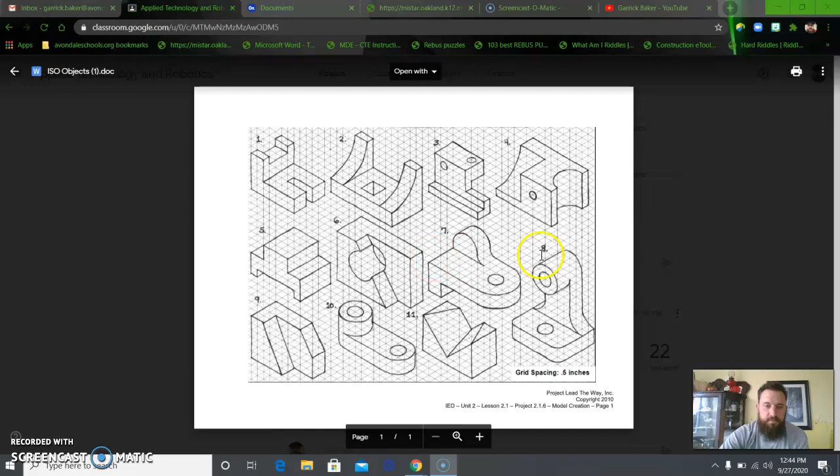All right, so now we're getting into some more difficult drawings here. 6, 7, 8, 10, and 11 are probably the hardest ones on here, in my opinion. So we're going to start with number 6 first.

Okay, so we're going to do this in 3 different parts. First this back rectangular shape, then we're going to add this awkward shape, and then we're going to put the hole through it. So I'm going to start, get the measurements of this object here and extrude it.

So it is, let's see, 1, 2, 3, 4, 5 inches long, and 1, 2, 3.5 tall. So I'm going to go 5 by 3.5. I'm going to create a new document.

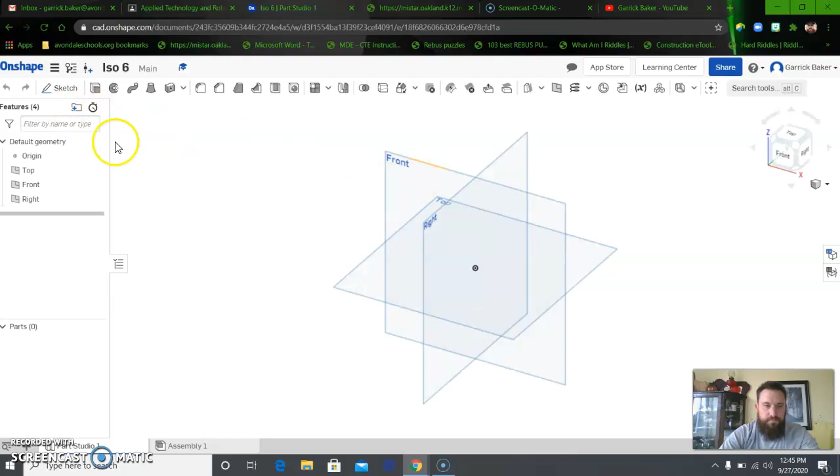ISO 6. I'm going to create a sketch on my front plane and click front to change to view, and I'm going to make a rectangle using a corner rectangle, and it's going to be 5 by... let's double check. Let's see, 1, 2, 3, 4, 5, 6, so it is 3.5 tall.

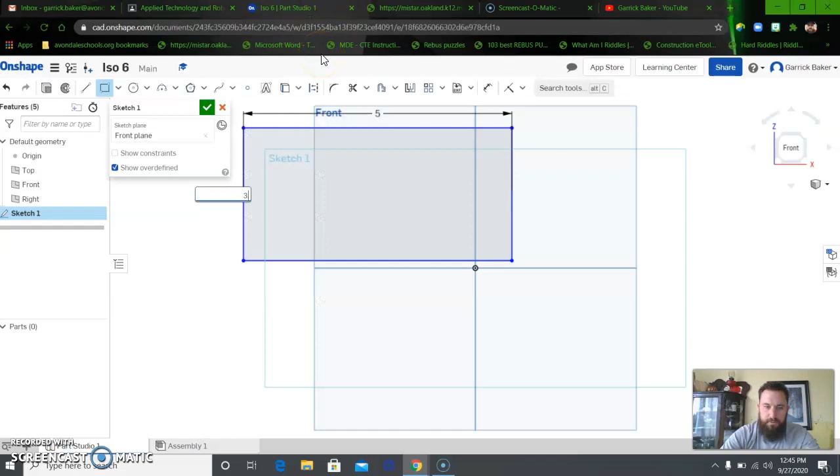And then when we go to extrude it, okay, it is 1 inch of an extrusion. So I'm going to click on extrude and go 1 inch. All right, so now I'm going to do this awkward shape right here on top of it. Okay, so I'm going to draw it out using the line tool.

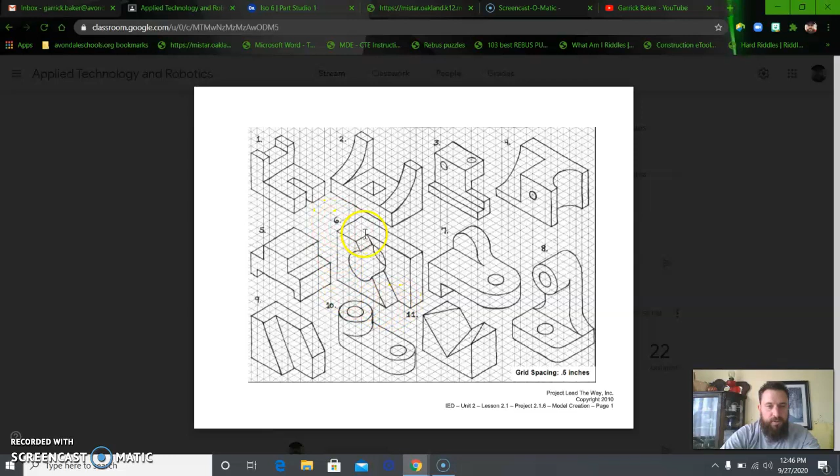All right, so I'm going to start from this side and go over to connect this angle, because it's easier to do the measurements all around the angle, the slant here.

So I'm going to start by making a line from here to the edge. I'm going to create a sketch on this face right here, click on front. I'm going to make a line from here over, and that length of that line is 4.

Oh, I gotta click my line. There we go, length of 4. All right, let me try that again. Apparently I didn't start it. So there we go. Start, click, 4 inches.

Okay, so that's where it is going to end. I'm going to click escape here because I'm going to make this part of the line here. It goes all the way up and over 1.5.

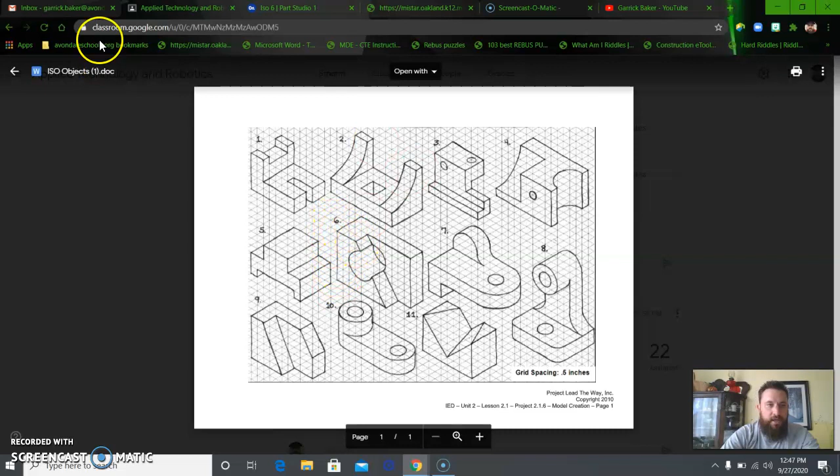So I'm going to click on line. This is my starting point. I'm going to go all the way up, and then over. That line is 1.5. Now this, I have my starting point and my end point of my slant.

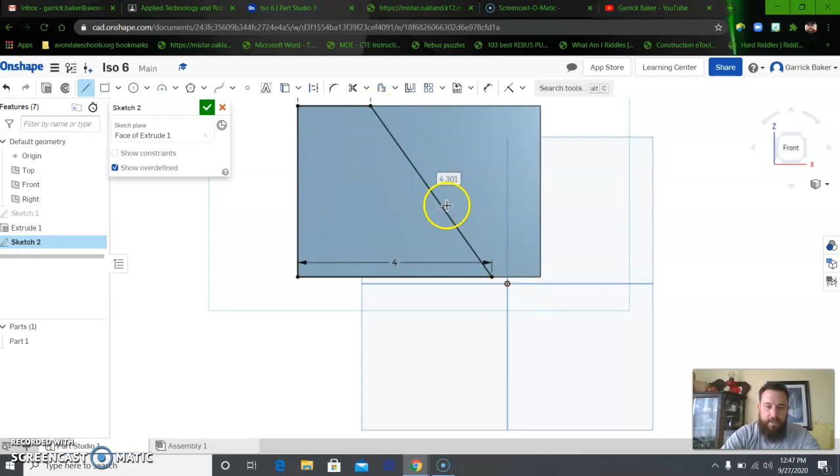So now we know we just connect it, and that automatically makes that slant without having to do the angles of these corners here.

So I'm going to extrude that portion now, which again is 1. So I'm going to go to extrude. Again, looking at it 3-dimensionally makes it a little bit easier. Angle of 1, or length of 1. All right, so now we have that.

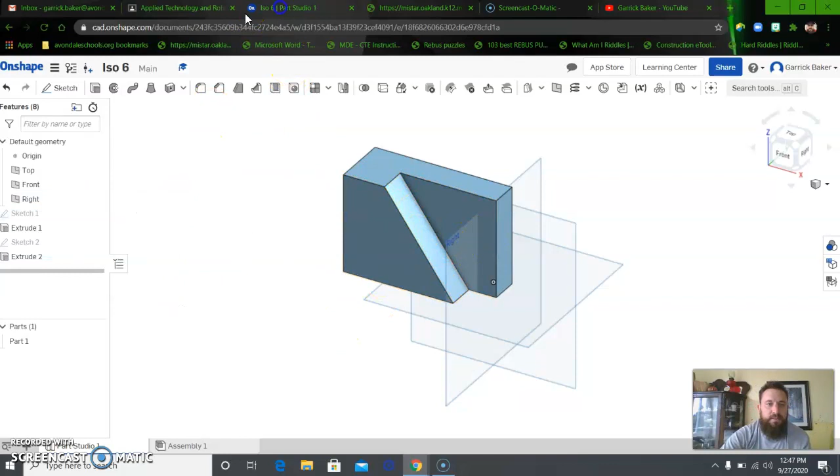So next we need to do is create the hole down the middle. So right here is the center of the hole. Zoom in a little bit. All right, so if we count up, we go 1, 2. So it is 2 inches up, and at 2 inches from the side.

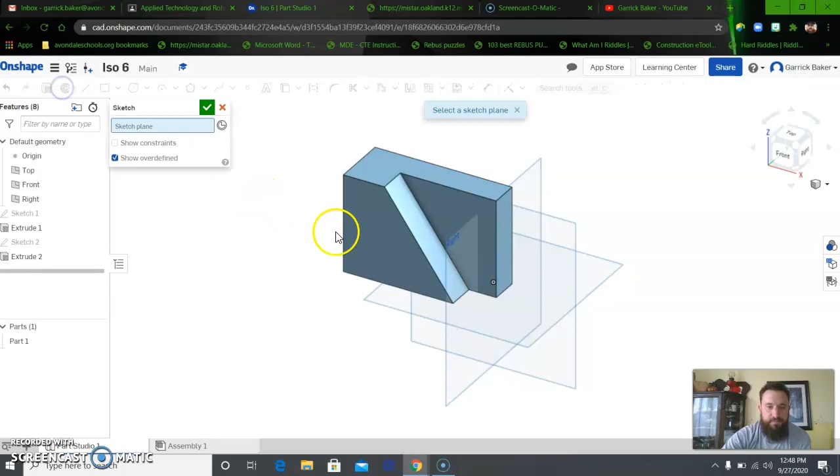All right, so I'm going to do the point option. I'm going to click on sketch, and I'm going to create a sketch on this plane. Click on front, and I'm going to make a point. Right now I'm just going to click anywhere for the point because I'm going to measure with the dimension tool. It is measure from here to here, okay, and that is 2.

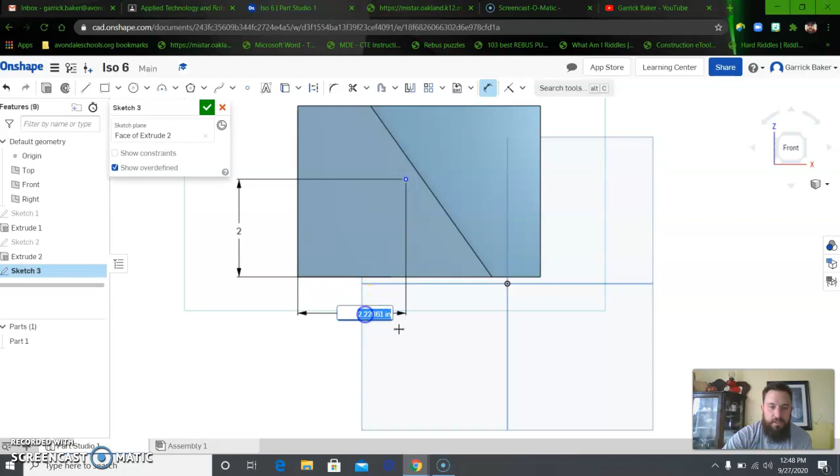And then from this line to the point, and that is also 2. So now I have my point. I can use the hole tool to make a hole that's got a diameter of... the radius of... diameter of 2, sorry. Diameter is 2 and the radius is 1.

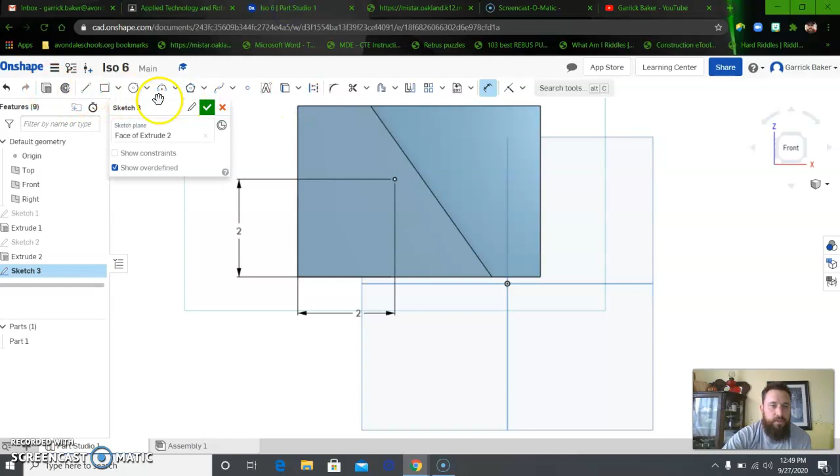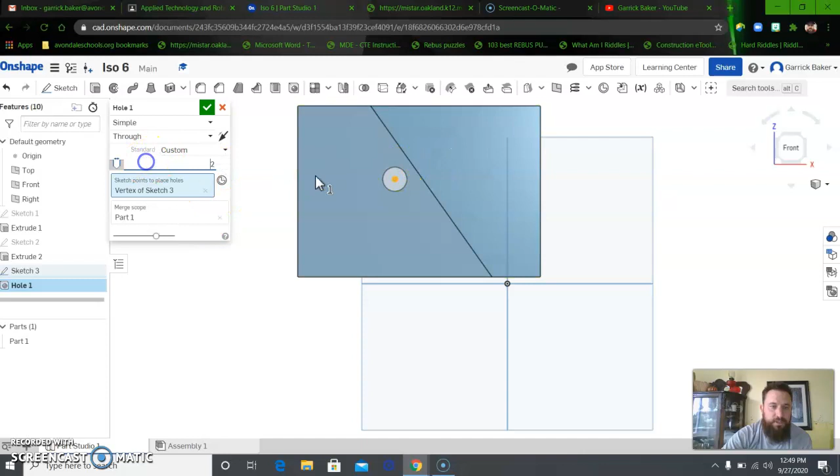So I'm going to click out of my sketch by clicking the green check. I'm going to come over here and use the hole tool. I'm going to select the point I made, and then I'm going to change this to through, and the diameter here is 2.

All right, and it should change my hole to that there, and then there is the hole for this object. So double check it. Okay, it looks very close to it, and when I say very close, I mean exact. So this is ISO number 6.